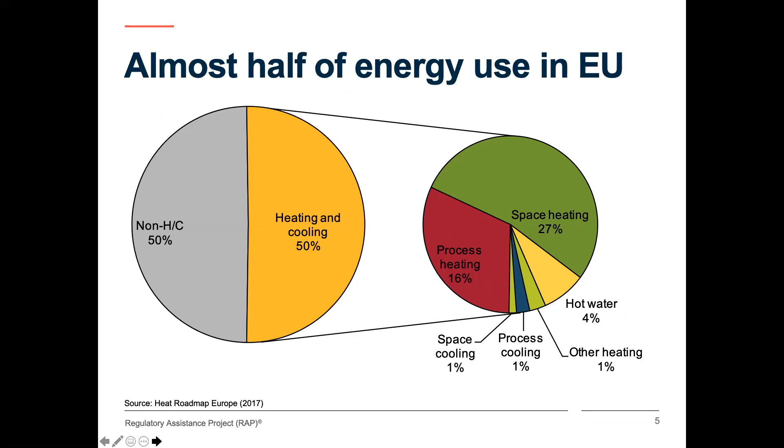And if we look at that in a bit more detail, the sub-pie chart on the right shows that the biggest part of that is space heating, and that is primarily keeping people warm in their homes and in their workplaces. And just looking at the existing heat generation mix in the EU here, what we can see is that presently 75% of heat in the EU is generated from fossil fuels. The biggest chunk of this is gas, but it varies geographically. It also includes coal and oil in different countries, and between countries it varies quite significantly.

But really what this shows, and the point that we're trying to make here, is that without tackling heat, you can't do decarbonisation. The simple goal really is that if zero carbon goals are to be met, no fossil fuels can be burnt for heating. I mean, that's quite obvious, but it does represent a transformational change to the sector.

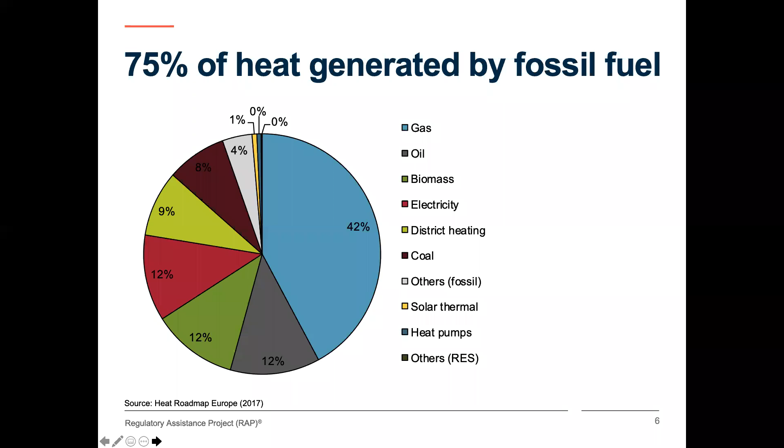Now, it's also worth pointing out before we move on that not all heat is the same. This isn't necessarily obvious, but heat use in the industrial sector has some very specific qualities, particularly around the temperature of heat required, something that's often referred to as the grade of heat. Some processes simply can't happen without very high temperatures. For example, glass can't be manufactured or melted without high temperatures.

Now, those high temperatures aren't necessarily needed to heat homes. And in fact, most heat is used to generate much lower final temperatures. For space heating, for example, at 20 degrees, and the production of hot water maybe at 50 or 55 degrees, but actually an even colder end-use temperature. Overall, the largest segment of heat use in the EU is for space heating in people's homes. And this is where our report is focused.

And I should say we also consider hot water because the two are very closely aligned in terms of their systems. The other thing I'd say is that if you look at the tertiary sector on that graph, that includes things like hospitals, businesses, schools, the big heat demand in those sectors is also space heating. So that means that many of the principles that we propose that are primarily focused at the domestic sector can also be applied to the service sector as well.

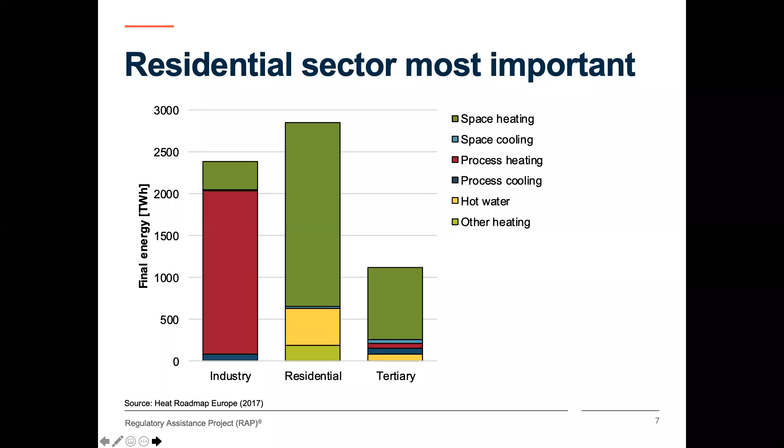Now, I said that not much had changed in the past 10 years, and that is roughly true to a point. A recent paper that was published only this month shows how the carbon emissions from heating have changed in the EU since 1990. And actually what we do see is a fall in emissions from 1990. And the graph on the left shows total emissions from residential heating by different fuel use, and that's coal in purple, oil in the top in that turquoisey green, and you can't quite see on the presentation, but the middle section, that blue, is natural gas.

Now, what this graph shows is the results from a combination of two things. What we're seeing is a reduction in overall emissions, and that's in part due to energy efficiency, but it is also in part due to some fuel switching from oil and coal to gas. And you can actually see that in this graph, the emissions from the gas sector have increased between 1990 and 2015, and from the other two sectors, they have reduced. And at the same time, energy efficiency is playing its part. So we've seen some change, but primarily this change links to changing uses of fossil fuels and some energy efficiency reductions.

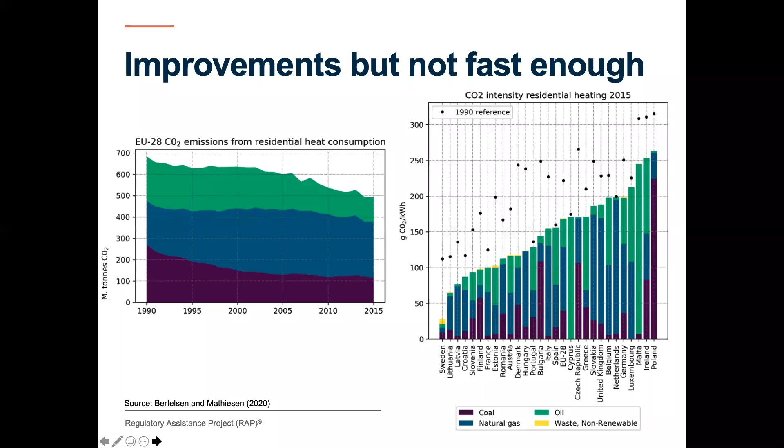So I'm actually now going to talk about the options for low carbon space heating and why currently electricity as an option appears to be so important. So it's often said that there are many, many different ways to decarbonise heating. And it's true to say there are many things you can do to actually decarbonise heat. But actually, there are only a few technologies which can deliver low carbon heat. So there are only a few ways really of generating low carbon heating in the first place. And for some of these, it's difficult to see how they can deliver at scale.

So solar thermal is a very low carbon technology. It can be a relatively cost effective technology. But the issue for countries at higher latitudes, in countries where there's a significant heating system, for example, the UK, France, Scandinavia, North America, solar thermal can't provide reliable output on a cold and cloudy day.

In fact, heating systems will generally be designed as if the solar thermal isn't present because the solar can't be relied on. What that means in practice is that if you, for example, have a heat pump system, that heat pump would be designed to match the maximum demand of the house, ignoring the solar thermal if it was there. And that's simply because on the coldest day of the year, you can't rely on that solar thermal to produce any power.

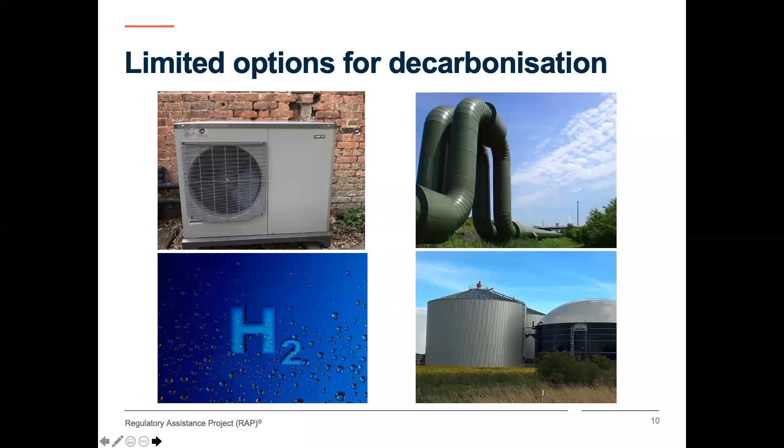So the expected widespread use of electricity for low carbon heating has been known for over a decade. Various countries have attempted to support some degree of heat electrification. Now, electrification is quite simply important because we know how to produce low carbon electricity, and it's quite easy to turn electricity into heat. Heat pumps are an important technology because they generate more useful heat than the energy that you put in from the electricity. It's also worth saying heat pumps can also be connected to heat networks, so they are quite a versatile technology.

Now, electrifying heat shouldn't be seen as easy. Lots of practical on-the-ground action is required across Europe and indeed the world. However, the reductions in the cost of renewable electricity I mentioned have been staggering. These reductions can feed through to electrified heat. The UK's statutory advisor, the Committee on Climate Change, has suggested actually that because of the cost reductions, reaching net zero will actually cost what they thought the 80% reduction, the previous target the UK had, would cost. Those cost reductions effectively mean that extra 20% emission cut is free.

So just looking at this graph then, it may look complex, but don't worry, it's really not. It just shows the emissions intensity for electricity in various European countries.

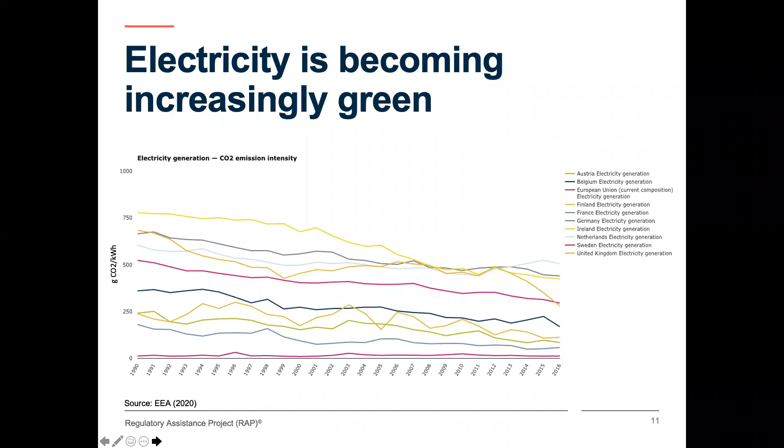Now, my heat pump has a rated coefficient of performance of 3.58, meaning that currently it's actually 3 or 4 times lower carbon than gas. Obviously, as the UK builds more renewable electricity capacity, which the country is planning on doing, particularly offshore wind, these emissions intensities will fall further. So basically, my house is future-proofed.

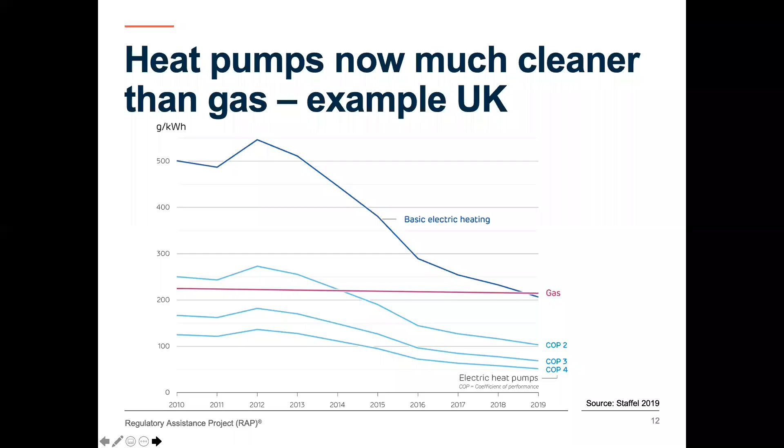Thank you, Richard. So Richard outlined how important electrification could be for decarbonising heat in the next 5 to 10 years, and possibly beyond that. And in order to maximize the emission reductions from this process, we have developed 4 principles for smart electrification of heat. And I'm going to walk you through each of those principles now.

And the first principle, and that's what you would expect from someone who has worked on energy efficiency for more than 15 years, is to put efficiency first. And we haven't really talked about energy efficiency so far in this presentation, but it should always be the first step that's undertaken to decarbonize heating. And the main reason for that is that it reduces the system cost of doing that.

All the major studies that have been done by institutions like the IEA at international level, the modeling by the European Commission at EU level, most recently for the Clean Energy for All package, for example, analysis at national level by several governments, all these studies have shown that energy efficiency is needed to make a major contribution to heat decarbonization and would significantly reduce the cost of doing that. So that's one really important reason.

And the second and often overlooked reason why efficiency is so important is that energy efficiency provides thermal storage capabilities for the buildings that get upgraded. In other words, you turn buildings that are highly efficient into what you could call a thermal battery that allows you to store heat for much longer periods of time than in inefficient buildings, which in turn then these buildings can act as a flexible resource to balance the power system when the heating is electrified.

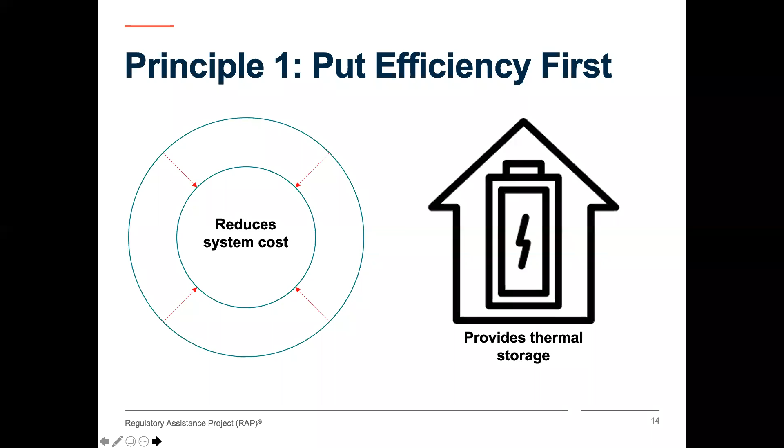Now we'll talk a little bit more about that when I get to the second principle. And I want to show you some data from Tado, a German smart thermostat manufacturer. They produced this report this year in February. It got a lot of attention, and they essentially measured the heat loss in over, I think it was 80,000 homes they had data for, in several countries in Europe. It doesn't cover all of the EU member states, but quite a few.

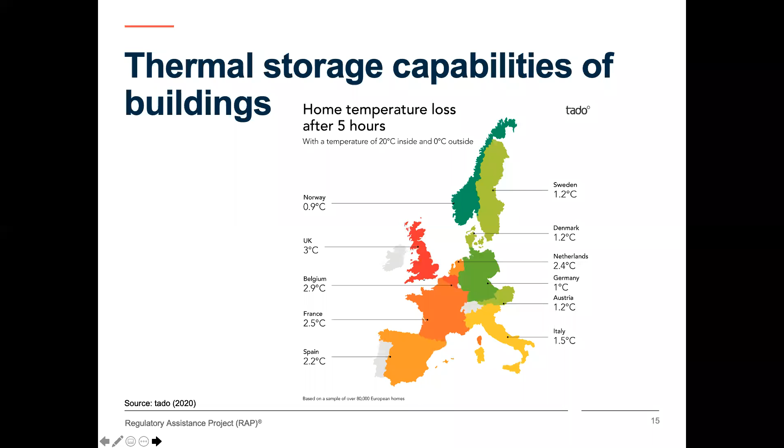So the top runners, according to Tado certainly, are Norway, Sweden, Denmark, Germany and Austria. The place that does worst is the UK, where I live, and that's mainly the result of a very old and very inefficient building stock. But this data shows that even in very cold countries, in Sweden and Norway, you can store heat for quite long periods of time without a significant loss in comfort. So why is this ability to store heat so important? And this gets us to the second principle.

So the second principle is to recognize the value of flexible heat load. One reason for operating electric heating systems flexibly is to avoid peak hours when it's particularly costly and often also very carbon intensive to generate electricity, and also to avoid unnecessary network upgrades. This is often an issue that people discuss when heat electrification is being analyzed, and without any flexibility, there could be significant costs for network upgrades that could be avoided.

And a recent study by Everoze Partners that came out 3 weeks ago actually looked at how much peak shaving we could do by combining smart and flexible heating with electric vehicles and the smart charging of those. And they suggested up to 40% of peak load could be avoided by doing that in homes that have a smart system for managing this. So that's one important reason.

And another reason for doing it is that renewable electricity generation may actually not coincide with heat demand if it's unmanaged. So a good example of that is wind generation, for example, which may occur during the night. And preheating buildings overnight can take advantage of that. Preheating and cooling is a really good strategy because buildings are actually pretty good at storing heat at a much lower cost than storing electricity in batteries.

There's also some experience with heat batteries to complement thermal storage capabilities of buildings, but so far that market is relatively small and relatively immature. And I think in the next 5 years, we'll probably see some real advancements with heat batteries, which could enlarge the flexibility potentials in buildings even further.

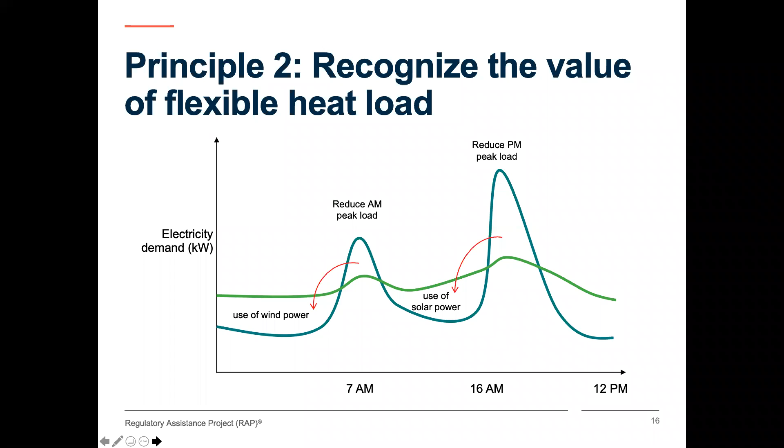And I want to give you one example of the value of flexibility that's from a very recent study that was published this year by the Hertie School of Governance. Ruhnau et al., the authors, published analysis looking at how flexible heat pumps could help to avoid wind curtailment. And they found that heat pump flexibility in a system with a lot of wind generation significantly reduces the marginal electricity system costs of covering an additional megawatt hour of the heat pump's electricity consumption. So why is that? Why is there such a significant reduction from combining flexible heat pumps with wind?

So the first reason they identified, and that's shown on this slide here, is that because heat pump load coincides relatively well with wind power generation, wind curtailment can be reduced. The second reduction potential for the cost of integrating heat pumps is around having system-friendly technologies. That's a term they use.

And that essentially means having technology that's smart enough to schedule the heat pump in such a way that it avoids the hours where there's less wind on the system. And finally, thermal storage reduces that cost even further by adding further flexibility. And taken together, and I quote the paper here directly, the combination of wind power, system-friendly heat pump technology, and thermal storages can almost completely mitigate the heat pump cost increase.

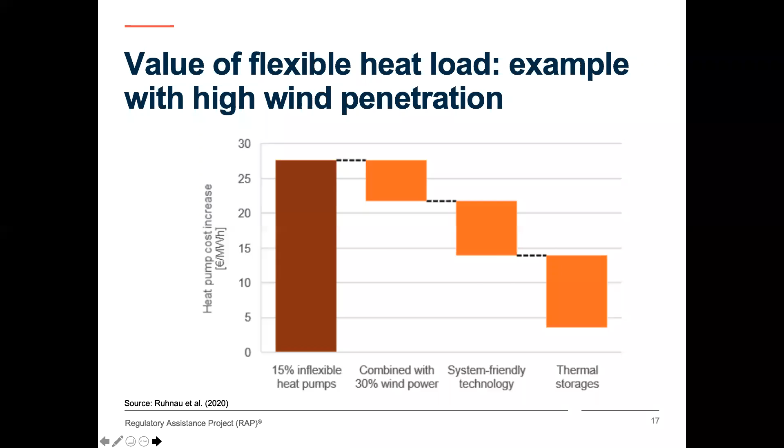And they talk about the energy system cost increase here, which includes everything from generation, transmission, and distribution grids and balancing. So let's look at the third principle now. The third principle is to understand the emission effects and changes of load. And this is really important.

It doesn't really matter so much anymore how much electricity we use, as much as it matters when we use electricity in a world that moves towards low carbon electricity. So as we add new electric loads, this is a really important consideration. And using averages for a kilowatt hour of electricity simply doesn't work anymore if we want to be honest about the emissions impacts of additional heating loads that are electric.

And what you want to do is to shift consumption to those hours when emissions are lowest to deliver the highest carbon emission reductions. And this also means that, again, if we operate electrified heating flexibly, we can reduce emissions even further than the average figures that Richard shared with us earlier, which are simply based on the average grid factor. So there's already technology out there actually that runs heat pumps based on the emissions intensity of electricity. So this can be automated based on the information that is being fed to the smart control unit of heat pumps.

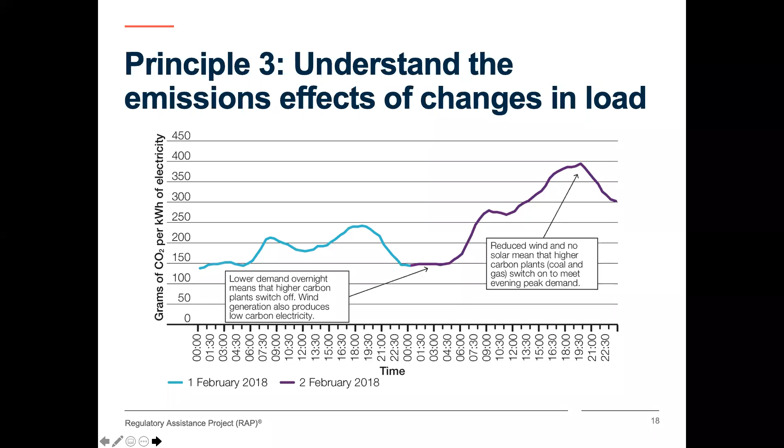And now the final principle that I would like to show you is to design tariffs to reward flexibility. As we demonstrated on the last slides, it makes a lot of difference when to use electricity, both in terms of carbon emissions, but also in terms of the energy system cost. And how do we actually encourage customers to shift their heating loads and participate in providing flexibility?

Tariffs for electricity in Europe are mainly flat for most customers. There are some exceptions, but most customers are on a flat tariff. And there's no financial reward for shifting electricity consumption outside of the most expensive peak hours. So if you operate a heat pump, actually you see no benefit as a customer if you avoid the peak hours. There are also some emerging business models with some dynamic tariffs, and I'll show you one here.

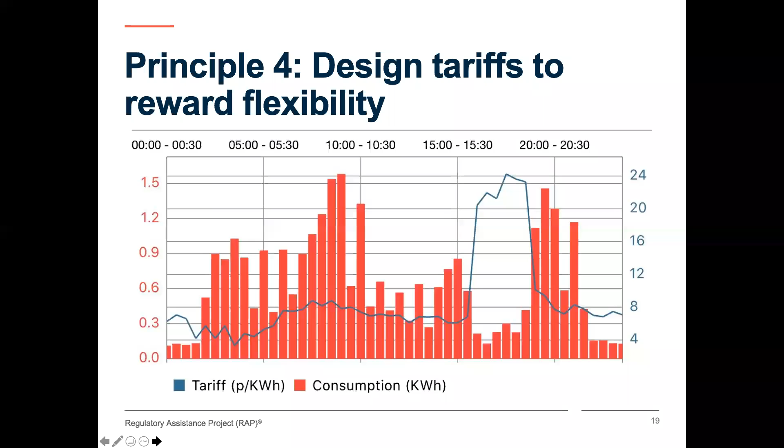The first step is to reduce the energy demand for heating. And this can be done through energy efficiency policies, of which already we have quite a few, including building codes, financing schemes, energy efficiency obligations, and so on. And a lot of that is being facilitated in Europe through the Energy Efficiency Directive, Article 7. However, as Richard pointed out, this could be strengthened, and we currently don't achieve enough reduction in terms of energy consumption as well as carbon in the heating sector.

The second step is that once we reduce demand, we will need to reduce the carbon intensity of the energy carrier further. And in case of heating electrification, this means reducing carbon emissions of electricity. And there's a whole range, of course, of existing policies already out there that are supporting that. And thirdly, we need to make sure that we phase out fossil fuel heating systems over time and promote the low carbon alternatives. And there's probably going to be a policy mix that's required, consisting of policy instruments, including regulations, but also financing instruments and energy efficiency obligations, similar to those encouraging reducing heat demand.

And finally, electricity pricing will be needed to encourage flexibility. If we don't have the right price signals, it will be very difficult to actually incentivize customers to shift their heating loads, which will result ultimately in higher costs for the energy system that will be paid by everybody. So there's a good case to be made for offering more granular price signals. So I encourage you to look at the report for further detail on this.

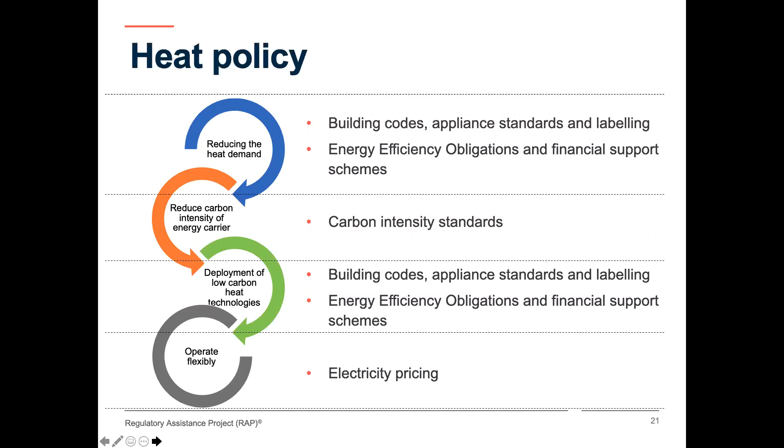I have one more slide to conclude, and then I look forward to seeing your questions and comments. So the conclusions from this presentation are that first, decarbonizing heat is critical for meeting the climate and clean air goals. And Richard has shown that with the data very clearly that without doing that, it's unlikely that we get anywhere close to the goals of the Paris Agreement, let alone net zero.

The second conclusion is that electrification is a central pillar, certainly in the next 5 to 10 years, in our view, and possibly beyond that. Yes, there's some uncertainty, but it's unlikely that electrification will not play a big role. Quite how big the role will be, nobody knows, and we will find out as we roll out more of these technologies. And thirdly, energy efficiency is really critical to minimizing costs and to build in thermal storage. Without energy efficiency, it's going to be a lot more costly and a lot more difficult to do this.

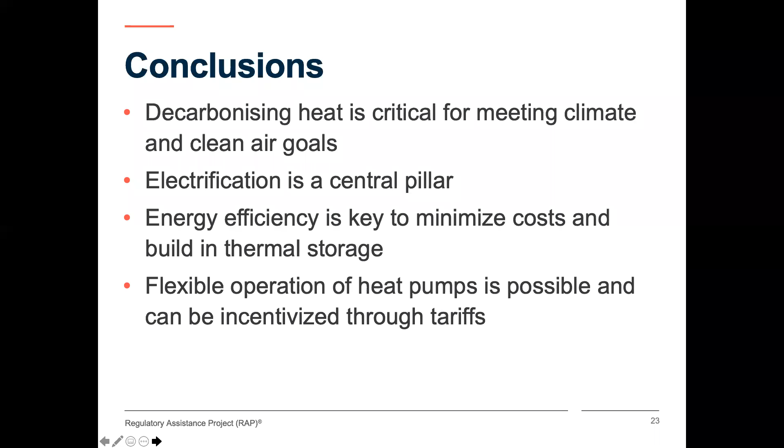Flexible operation of heat pumps is possible, and there's actually evidence for this. We can talk about that later on, perhaps in the discussion, that this works. And this can be incentivized through having smarter tariffs and rewarding customers for that flexibility. And finally, we need a whole range of policy instruments to accelerate the replacement rates of fossil heating technologies. There's a lot of work for us, but we are optimistic that the opportunities have never been greater, and there's a lot of possibilities for making this happen.